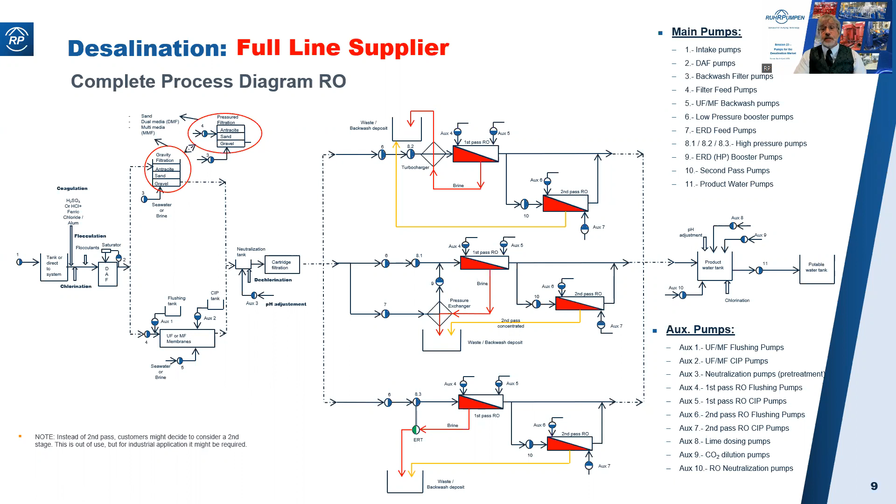This is the first pre-treatment stage - it's not always used - coagulation. DAF stands for dissolved air flotation. Chemical additives and flocculants are added, and air bubbles float the impurities to the surface.

Pump two here, DAF pumps. This is an OH1 pump, typically 300 to 500 cubic meters an hour at about 7 bar. Now, you're going to hear quite a lot of numbers, flows and heads in the next 20 minutes or so. They are purely indicative, just typical. You needn't write them down or try to remember them - you'll get a PDF copy of this slideshow, complete with my speaker notes, and that will include these figures.

Let's talk about metallurgy for a moment. The main pumps, these here, are in seawater service, and they're usually manufactured in super duplex. The auxiliary pumps down here are not in seawater service - they're in freshwater or chemical service. They're usually duplex; they could be 316L, but duplex is about the same price, and we tend to stock that material these days.

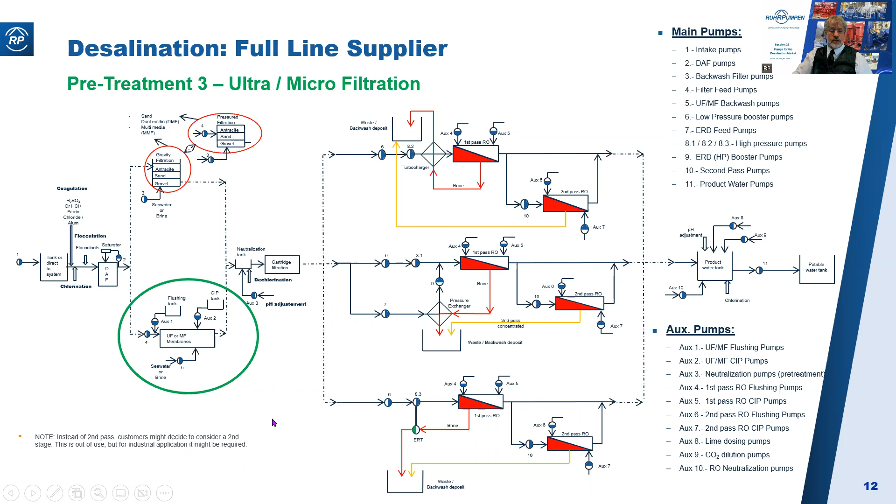And the fourth of the pre-treatments, neutralization. This is a critical process to protect the membranes. Auxiliary pump number 3 here, the neutralization pumps, small OH1 pumps in duplex, pumping acids and alkalis.

Moving on now to the main treatment. What we're doing is raising the pressure at the inlet to the reverse osmosis membranes to a value significantly above the osmotic pressure of the raw water. This osmotic pressure varies widely geographically according to how salty the water is. A typical figure might be 40 bar, in which case we would want to operate at 70 bar to maximize throughput and get a recovery rate of 40 to 45% of the inlet flow.

We show here 3 different systems, the difference being the method of energy recovery. You have 70 bar going in, and the permeate, the clean water coming out, is at 0 bar, and the brine coming out is at 67, 68 bar. So you definitely want to recover that sort of energy.

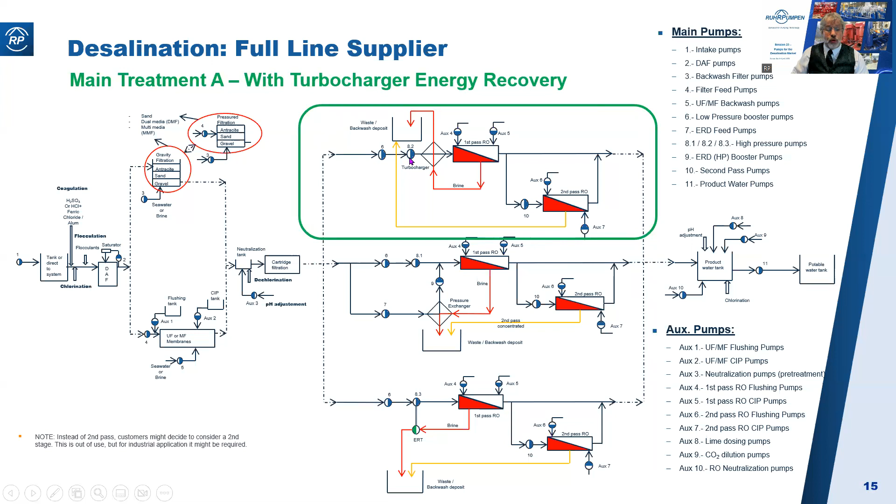System C here uses a self-standing Pelton wheel for energy recovery, like this. This is connected to a double-ended motor shaft, and so it doesn't affect the flow and head like the turbocharger did in System A. Again, it's not so common these days.

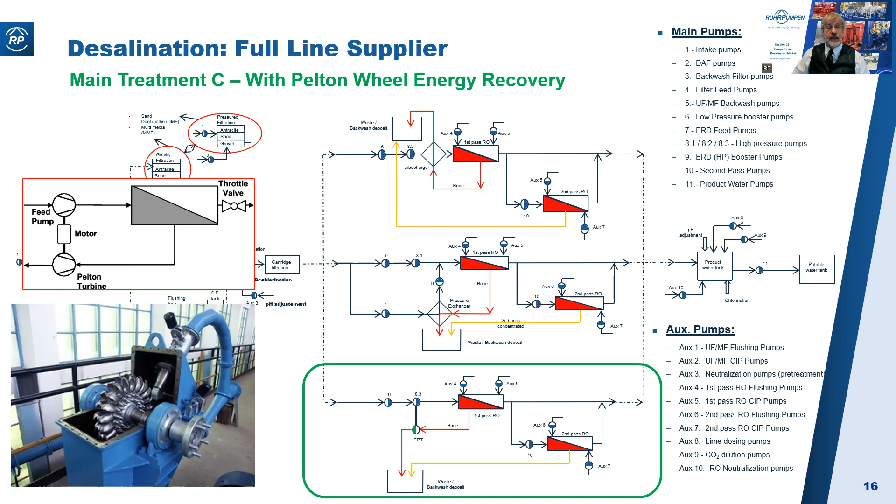This, treatment B, uses a pressure exchanger for energy recovery. This is the most important system. Incoming seawater gets split into 2 streams and goes to the high pressure pump and also to the pressure exchanger, the PX. Now this PX needs a minimum of 1 to 2 bar inlet pressure.

So depending on the seawater pressure, you may need a booster pump here, which is pump number 7, an OH1 giving 2 to 3 bar, say. The high pressure brine gives up its energy in the pressure exchanger, and the pressure here may be about 66 bar.

So we need a special pump here, pump number 9, to boost the pressure from 66 bar back up to 70 bar, the same as the outlet from the high pressure pump. I say it's a special design of pump - it's an OH1 pump designed for 69 bar inlet pressure and the high thrust that results from that.

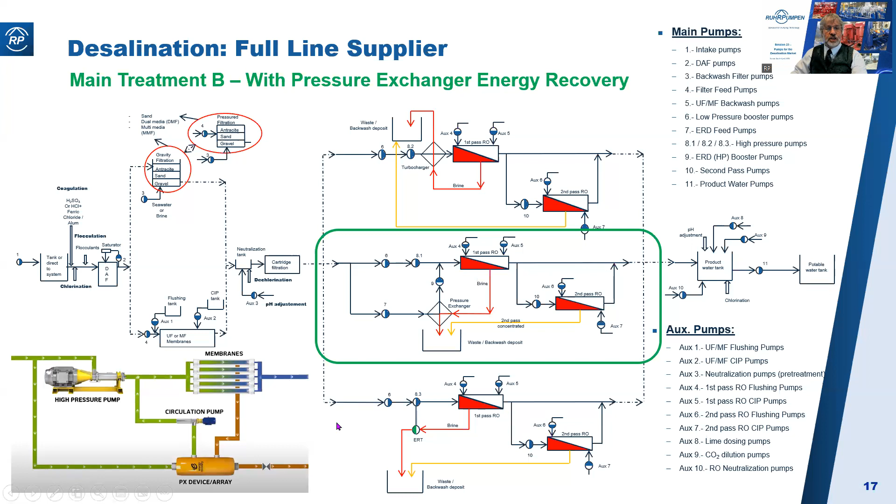Let's look at the pressure exchanger. I won't try to explain here how it works - I'll just refer you to the Energy Recovery Inc. website, where they have a very good video showing how it works.

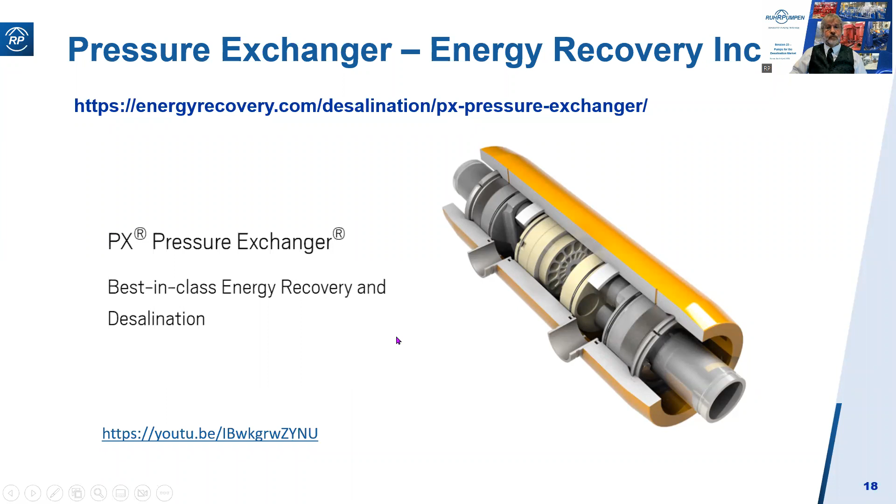In all three main treatment variants, we see the option for a second pass reverse osmosis membrane bank. This may be required to meet local water quality requirements.

The feed water to these is permeate water from the first stage, so its osmotic pressure is far less, and so the working pressure will be far less too. Feed pumps, P10, second pass pumps, will have an inlet pressure of around 0.5 bar and an outlet pressure of about 12 to 15 bar, compared with 70 bar on the previous one.

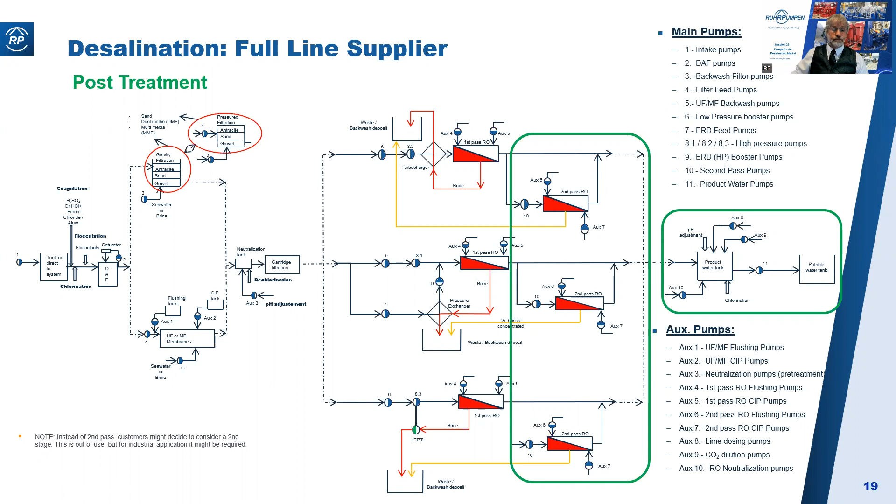It's relatively clean water, so duplex stainless steel can be used for this feed pump, or these feed pumps. Auxiliary pumps 6 and 7 will be duplex material OH1 pumps.

And so to the final stage of post-treatment to meet the required water quality. There'll be pH adjustment with lime and dilute acid and chlorination. Auxiliary pumps 8, 9 and 10: lime dosing, CO2 dilution and neutralization pumps. They're duplex OH1 pumps, 200 to 300 cubic meters an hour at 20 to 30 meters of head.

And finally, the product water pumps, pump 11. This will be a duplex material, very high flow, low head pump, maybe an OH1 or more likely a BB1 axially split case pump.

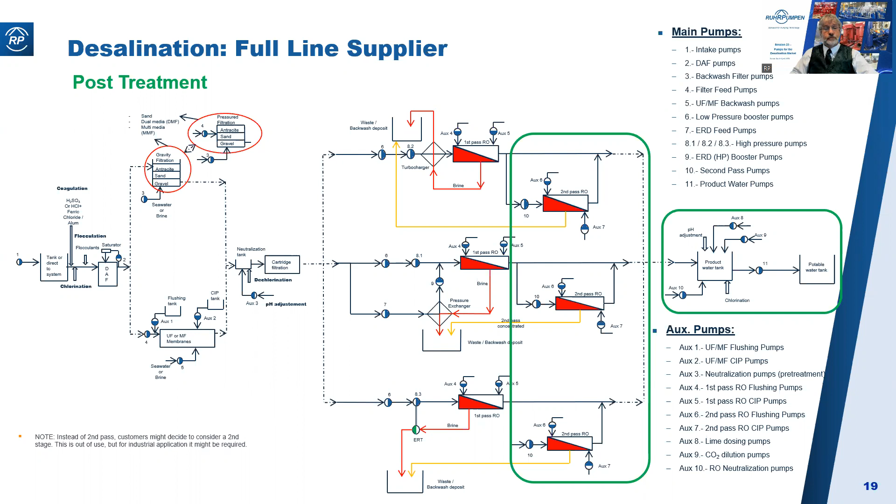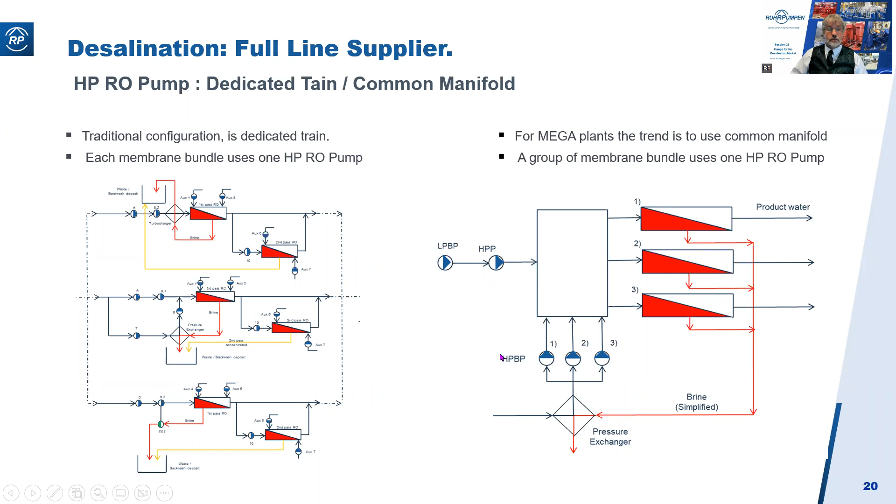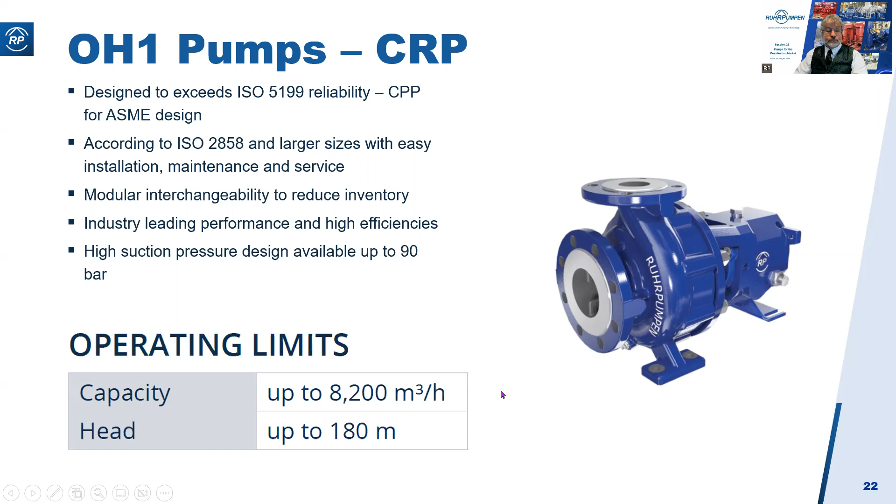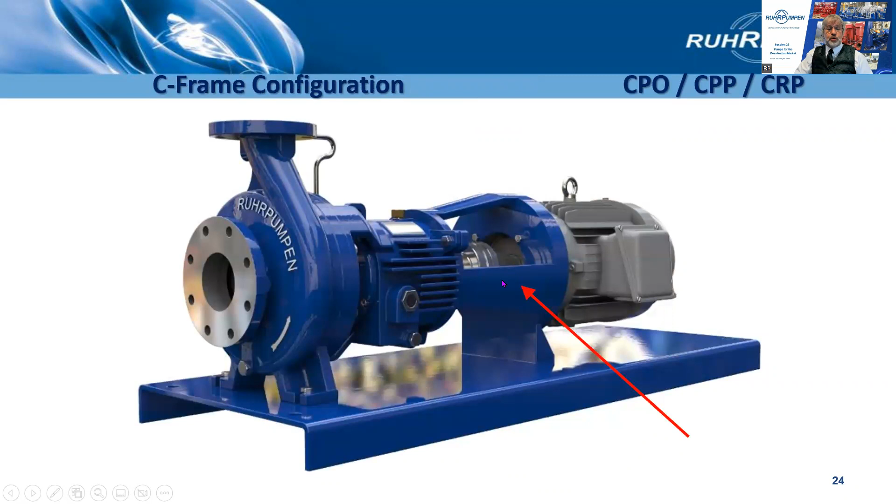The next few slides are going to look at ANSI pump features. Here's a typical ANSI or ISO pump. It's foot mounted, has a formed steel base plate, sometimes with a drain pan, and it has a foot mounted motor. A common variation is the C-frame adapter, which allows you to use a NEMA C-flange motor instead of a foot-mounted motor.

Here are some features of an ANSI or ISO pump. This is the Ruhrpumpen offering, but other major manufacturers are very similar, by the very nature of the ANSI or ISO specification. Bare shaft pumps are designed to be interchangeable between manufacturers. Bearing life, according to spec, is 17,500 hours, but Ruhrpumpen have upgraded to 50,000 hours. I'm not sure whether others have done likewise.

ANSI B73.1 specifies sizes up to 4,000 gallons a minute, but Ruhrpumpen goes up to 36,000 gallons a minute in desalination service. We've added a lot of sizes, in fact about 70 pump sizes, going up to 36,000 gallons a minute and heads to about 200 meters.

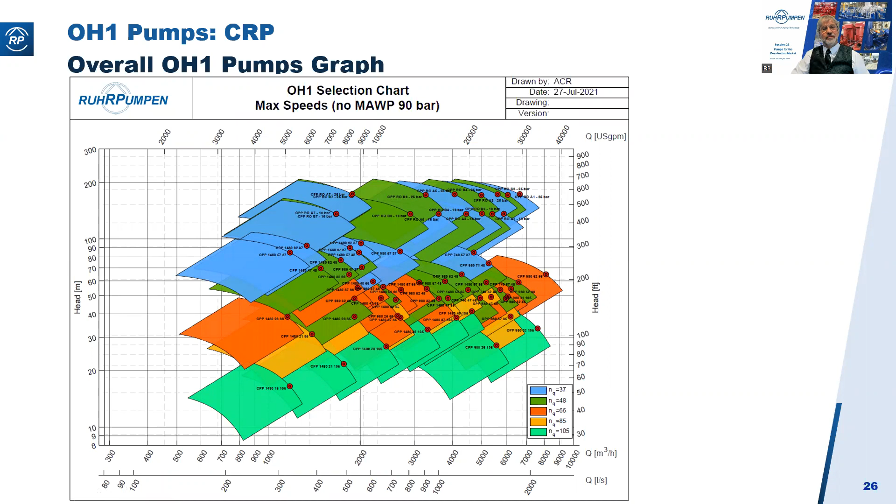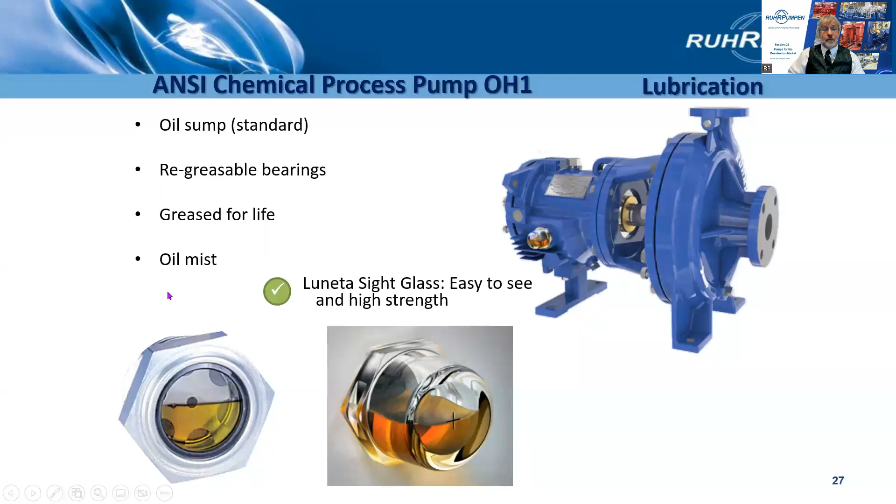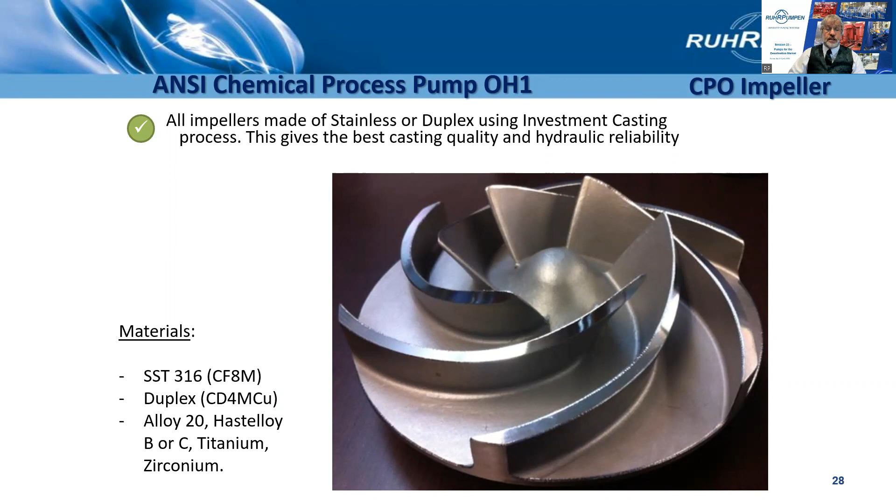We have 4 options on bearing lubrication. Many manufacturers, including Ruhrpumpen, use semi-enclosed impellers, and these can be adjusted in service to allow for wear.

Here is how the axial clearance is adjusted. This bearing carrier is threaded to the pump frame and rotates to displace axially the entire rotor, which will move forward or back and open or close the clearance between the impeller vanes and the pump casing.

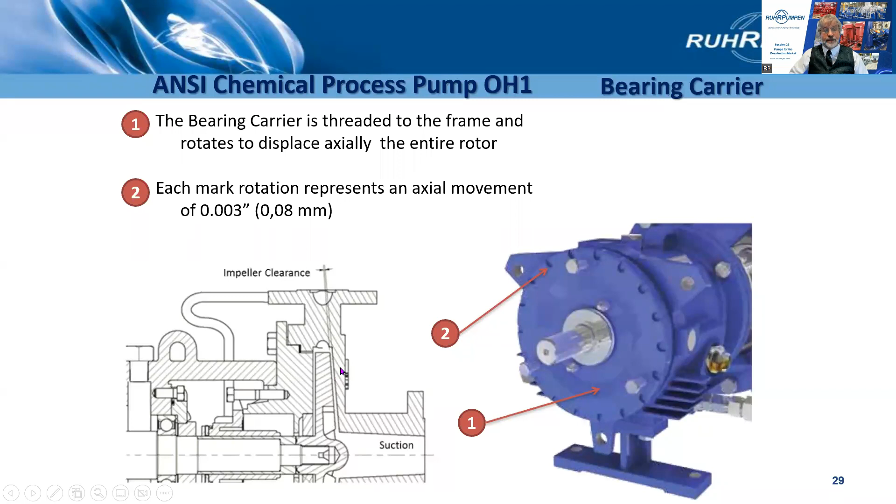Here you see it a little better, 3 hexagonal bolts. You release those and then you can twist it round, click, click, click, each click being 0.08 millimeters or 3 thou.

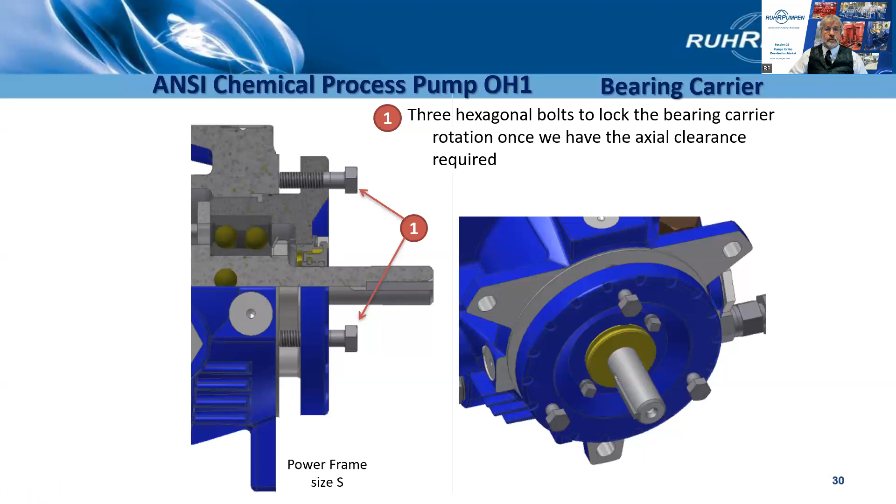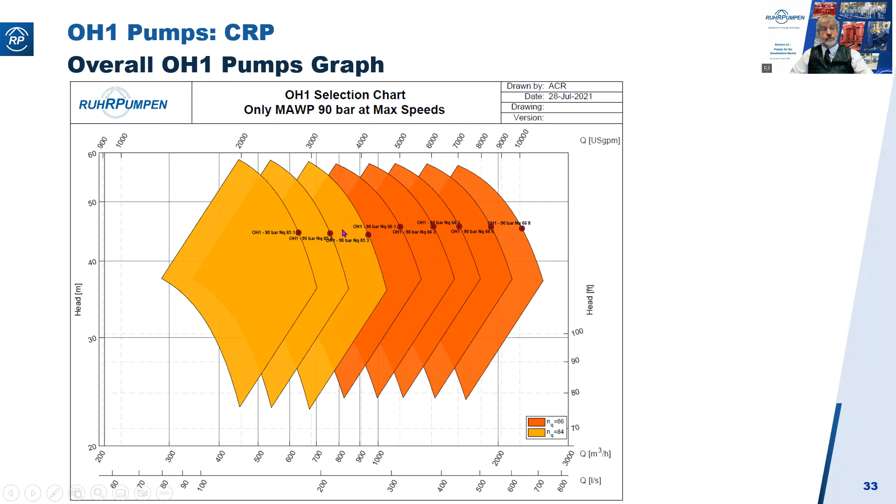I mentioned earlier some special design pumps of OH1 type, designed to handle 82 bar of suction pressure. That was pump number 9. Here are those pumps, and we're actually designing them for 90 bar max allowable working pressure. We've had to beef up the pump to withstand this pressure, but also to accommodate the thrust.

As you will realize, 82 bar pressing in this direction is going to try and push the rotor out the back end of the pump, so we've designed more robust thrust bearings to accommodate this.

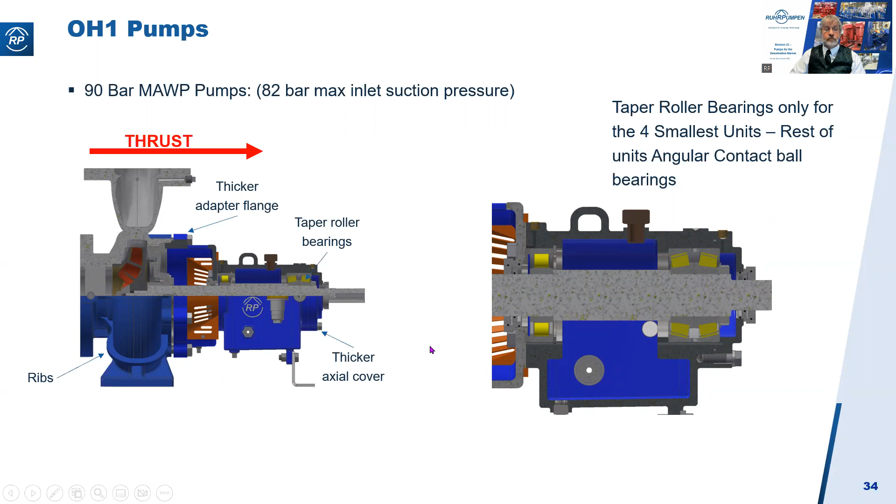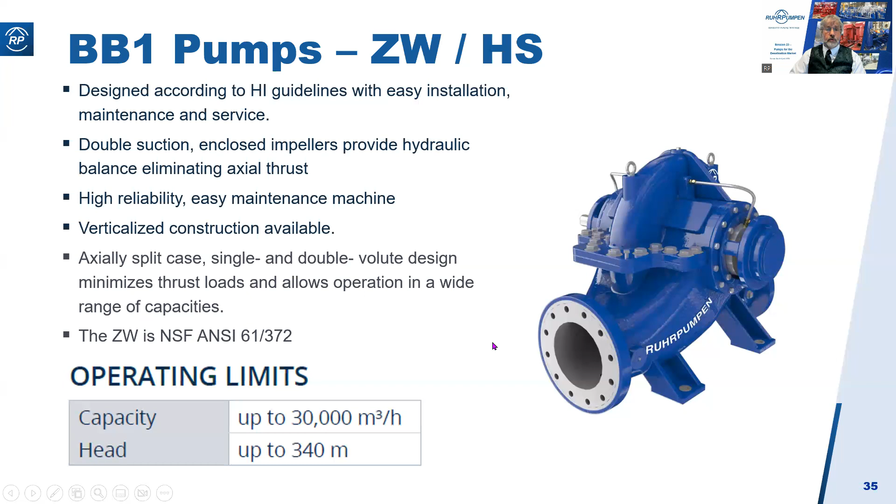BB1 pumps for the higher flows and heads, 30,000 cubic meters an hour, 340 meters. These are an axially split case pump, so you can remove the top half casing and then remove the rotor for servicing. They have a double suction impeller and a double volute casing to give low shaft deflections, which leads to long seal life and 100,000 hour bearing life.

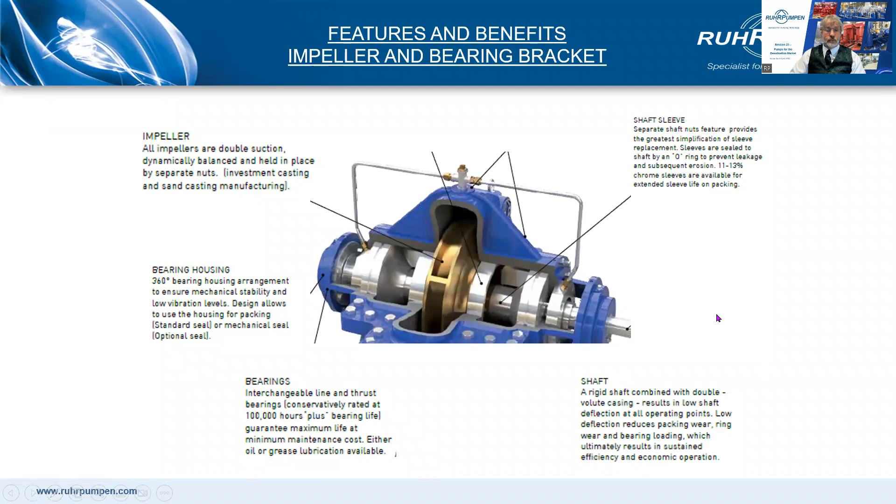Case wear rings are standard and impeller wear rings are optional. Vertical arrangement is available to simplify piping and minimize floor space. A vertical mounted pump will take up about 20% of the floor area of a horizontal base plate mounted pump.

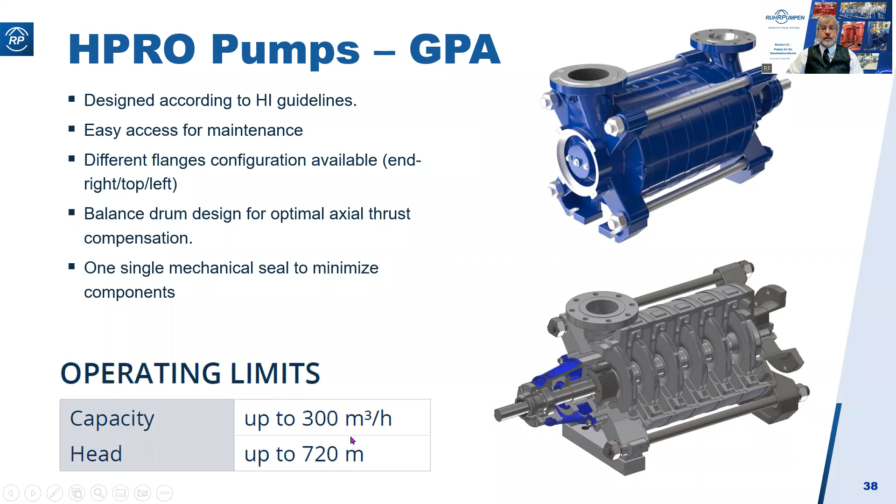The high pressure reverse osmosis feed pumps. Well, for small pumps, we have this baby pump, the GPA, up to 300 cubic meters an hour, 720 meters. Its big brother for larger pumps, larger plants, is the GP, and goes up to 1,000 cubic meters an hour.

Now, if you attended session 21 of these courses on BB4 pumps for the power market back in March, about 4 weeks ago, then the next few slides will be familiar to you.

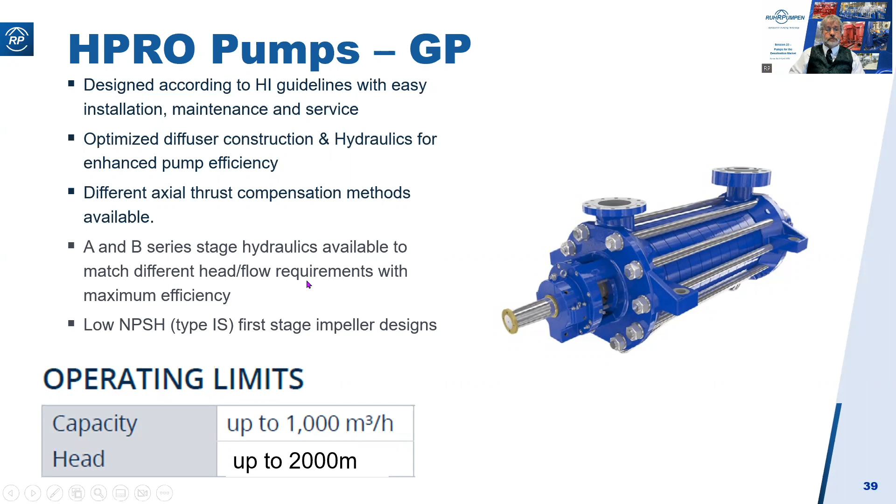BB4 pumps are described by API 610 as single case, multi-stage, radially split case pumps, but also popularly known as ring section pumps, segmental ring pumps, and tie rod pumps.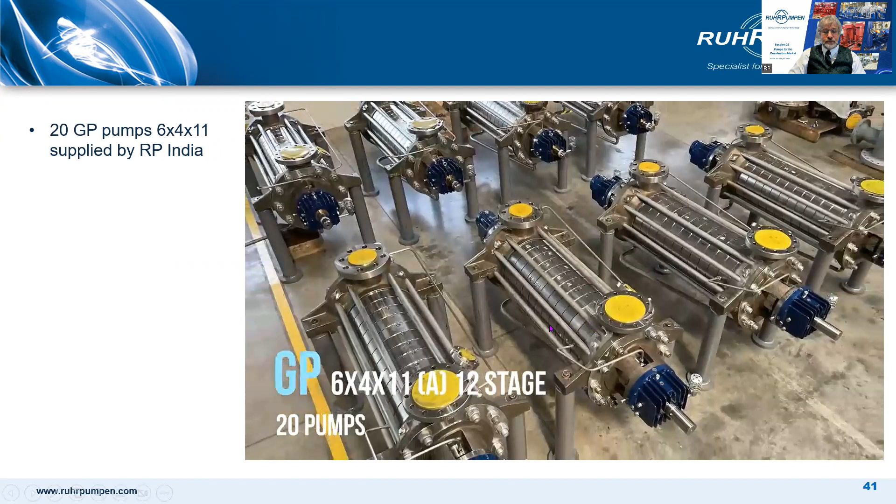This is the Ruhrpumpen model GP pump for desalination service. It's based on our market-leading BB5 barrel pump hydraulics. It's a ring section pump with tie bolt design, and it's centerline mounted.

The hydraulic design is designed for 2-pole, 50 hertz or 60 hertz. It's not a high-speed pump. It doesn't need to be either. High and low flow impellers are available for each pump size. This is good for retrofits and re-rates for duty changes in the future.

A low NPSH first stage is available, and we have designs for interstage takeoffs. This is a requirement in the power industry. It's not really necessary in the desalination market.

The hydraulics have been and continue to be optimized by CFD, computational fluid dynamics, to maximize efficiency. And this is an ongoing, continuous improvement.

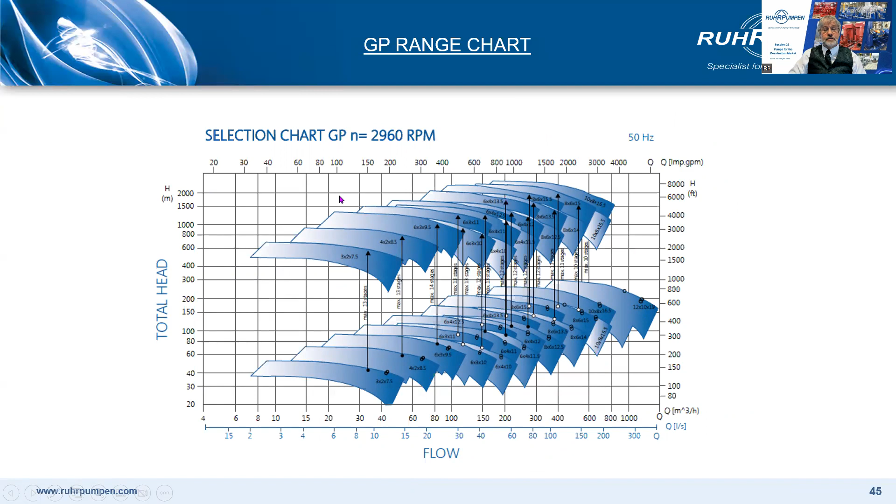Here's the range chart at 50 hertz, flows up to 1,200 cubic meters an hour and heads to 2,000 meters. And at 60 hertz, flows to, I'll give it to you in gallons this time, 5,280 gallons a minute and heads to 10,000 feet, not 1,000 feet as we show here on this scale.

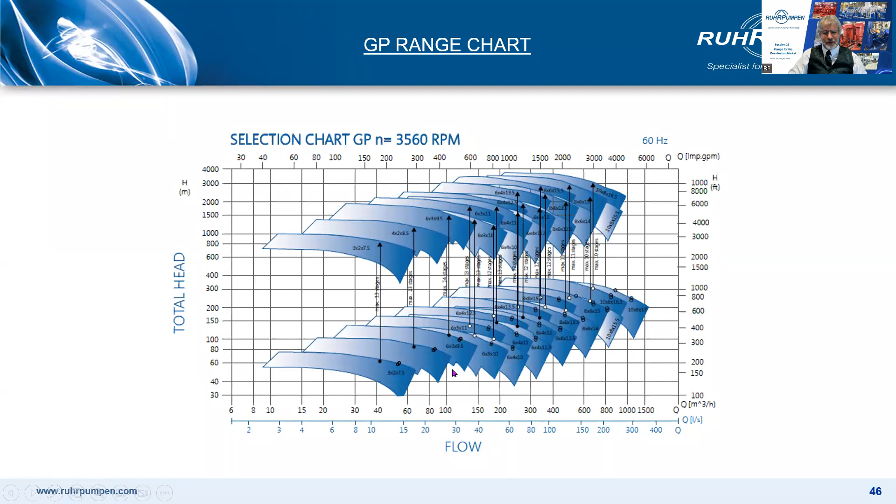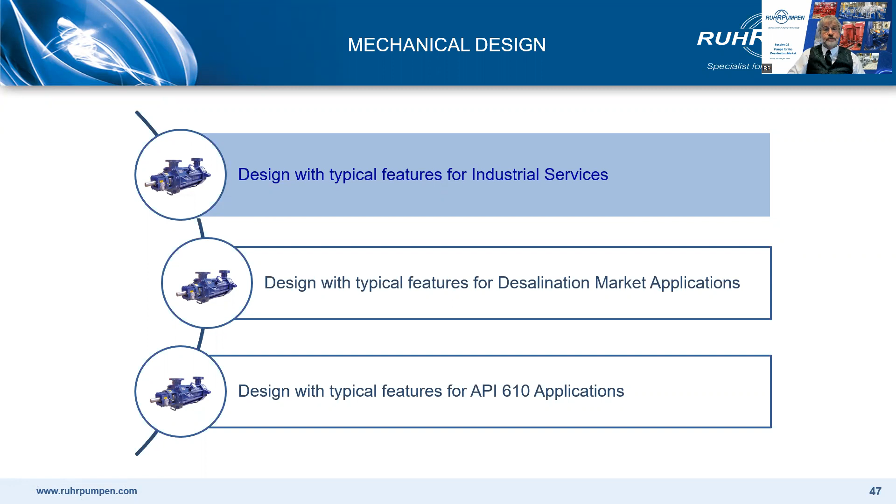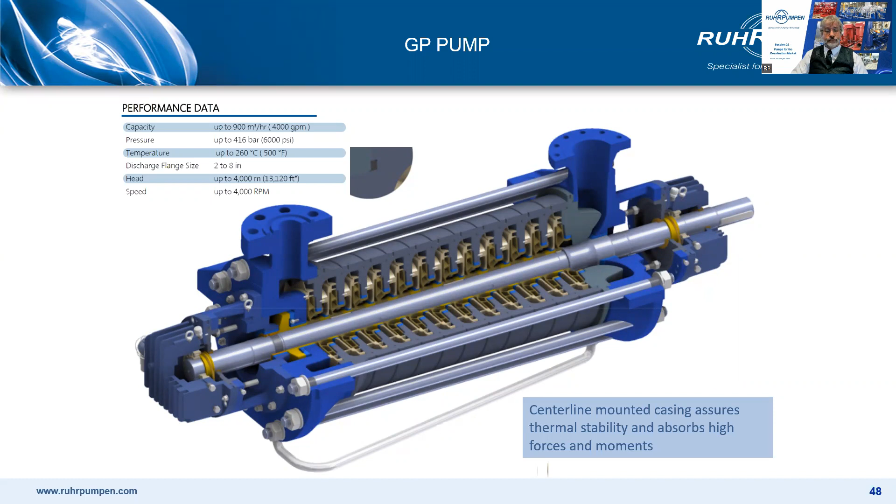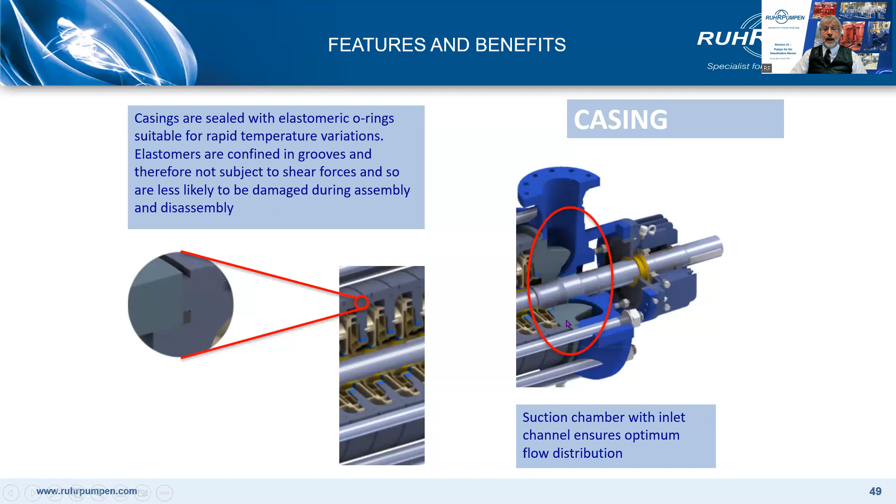Here we have the optimized inlet channel to ensure good flow into the impeller. You saw this in the earlier slide on suction chamber CFD design here. So it's been optimized to ensure peak efficiency.

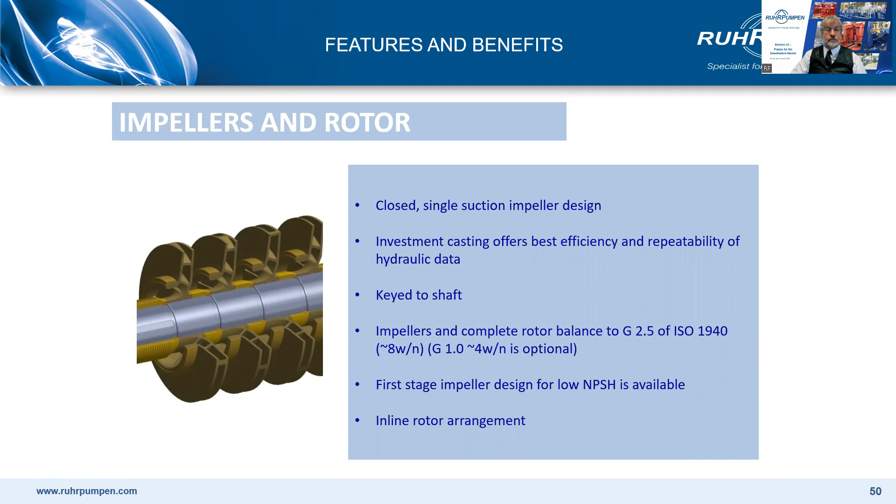Impeller mounting and shaft, we have two designs. One with a straight shaft and sleeves securing each impeller. This is used on the smaller, lower pressure pumps. The second version, the API version, with a stepped shaft and impellers individually secured by split rings. This is used on larger, higher pressure pumps.

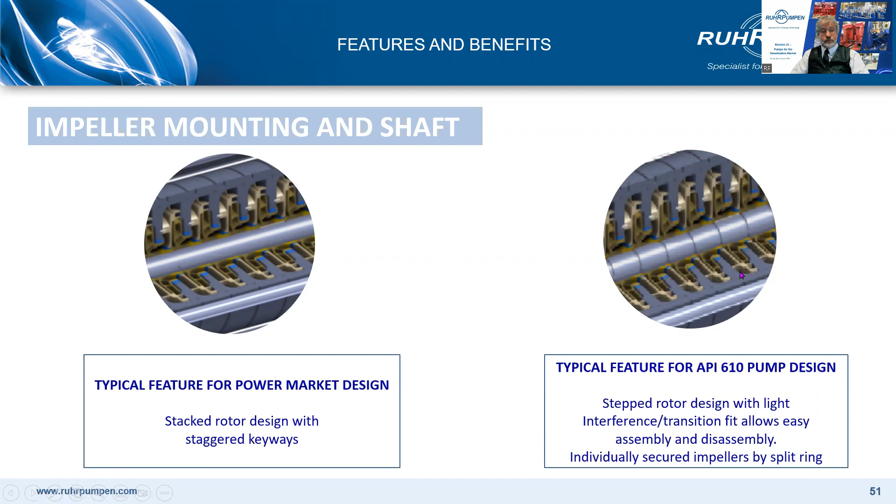Wearings. Well, the base design case has case wearings only, no impeller wearings. Impeller wearings can be fitted later at the first service. After 3 to 5 years, when some wear has occurred, you can remove the rotor, remove the impellers, machine away and put impeller wearings on at that stage.

There's no advantage to fitting impeller wearings at the outset because you still have to machine them off after 3 to 5 years to fit new ones on. So our recommendation is case wearings only initially.

We run with closer clearances than API recommends, and this is for optimum efficiency. We're pumping clean water with no solids, so it's not high temperature, so it's fine to use closer wearings, clearances, and get the higher efficiency.

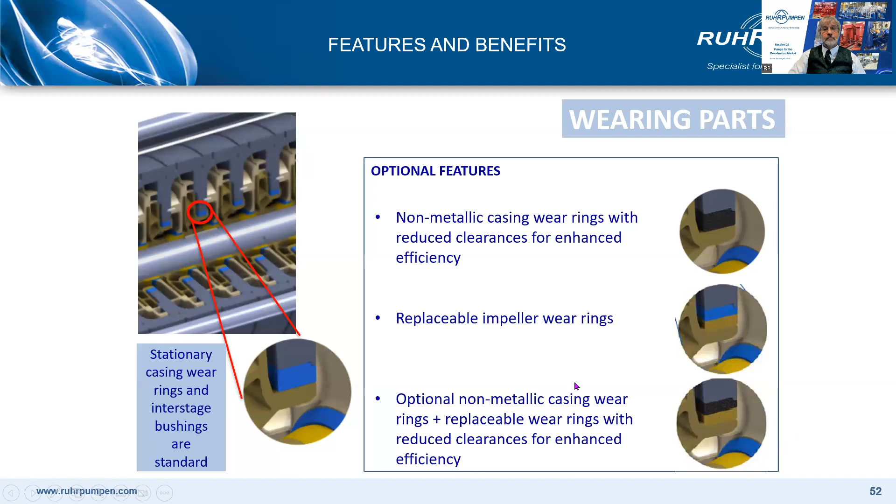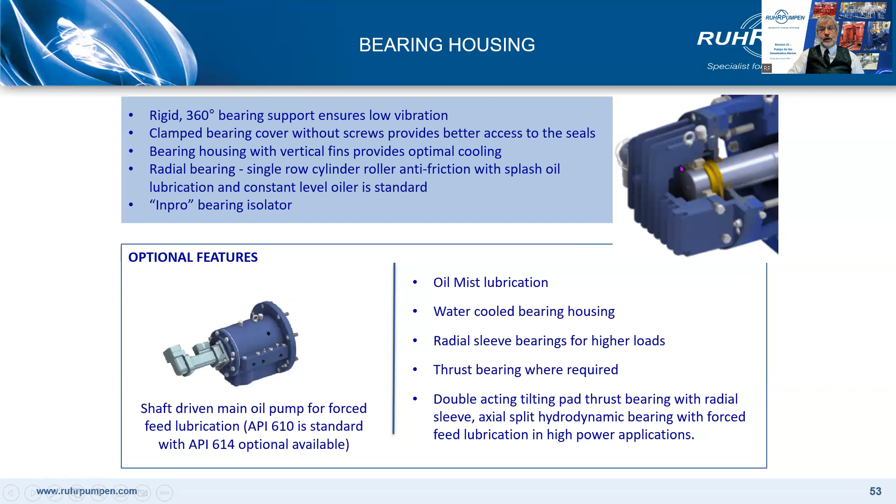Which brings us to hydraulic balancing or thrust balancing. With a BB4 pump, you have stacked impellers, all facing the same way, so the thrust builds up and is more than a conventional ball bearing can take. So there are several ways of handling this thrust.

You can have opposed impellers, 5 facing one way, 5 the other, thus equalizing the thrust. This is what we do on BB3 and BB5 pumps. On BB4 pumps, we use either a balance disc or a balance drum.

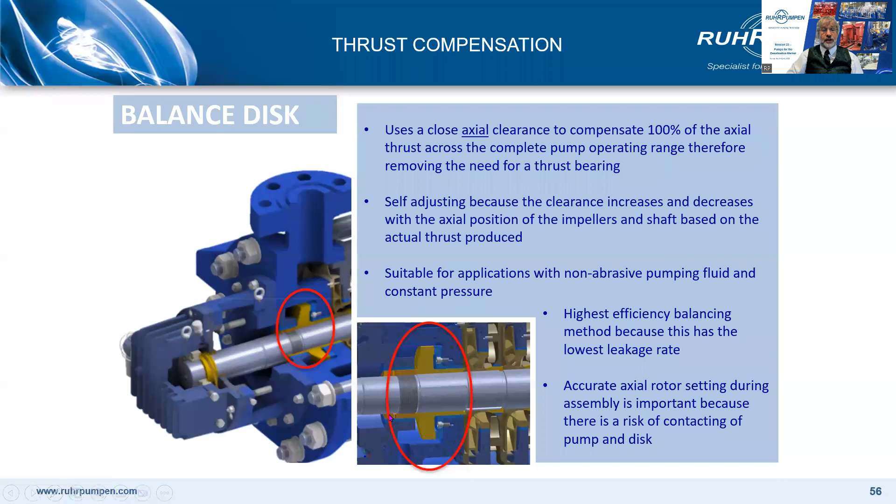Here is the balance disc. You have full discharge pressure on this side and suction pressure acting on this side. The pressure, the thrust, is broken down by close axial clearance between these two faces here. It balances out 100% of the thrust, so no thrust bearing is required, just a radial bearing.

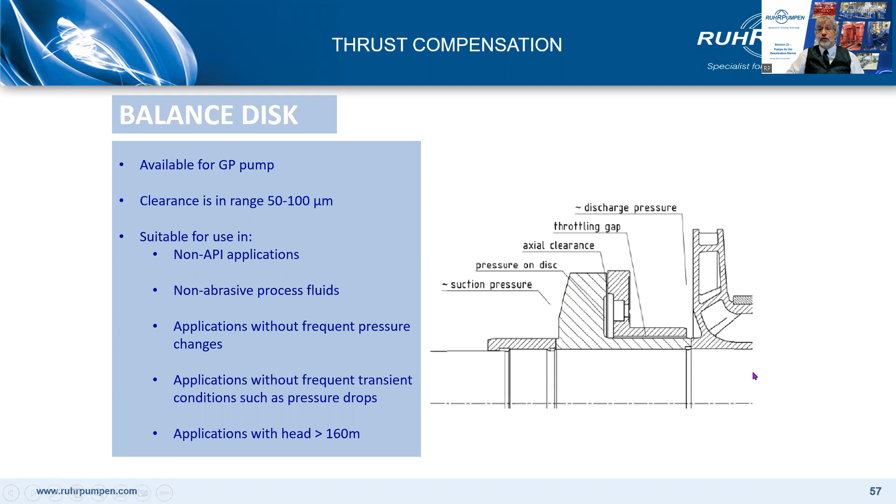Now, the close running clearances mean it's only suitable for clean fluids, so it's ideal in desalination reverse osmosis plants. API 610 is written with process fluids in mind, which are frequently hot and frequently contain solids, and they say this design is not suitable for that. Well, that's right, it's not suitable for that. API 610 therefore does not allow balance discs, but they are ideal for clean water service like this.

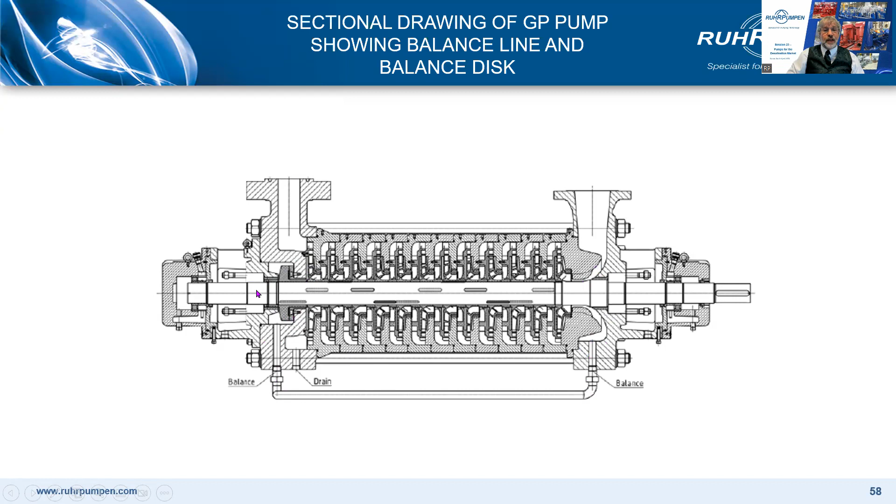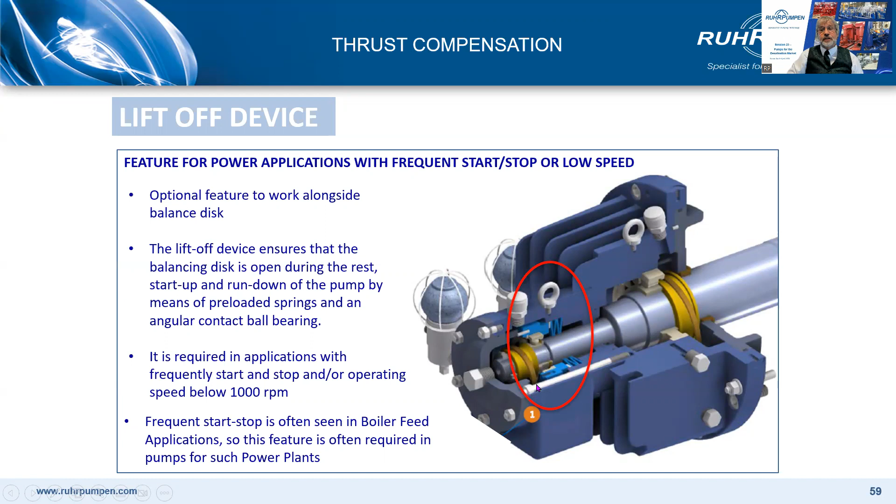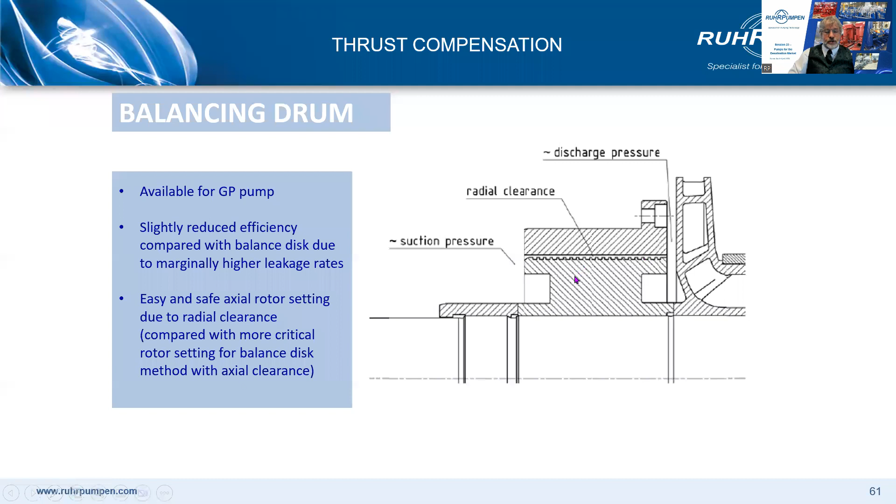We have several bearing combinations according to your needs and preferences. Here is the simplest and least expensive, used with the balance disc. We have no residual axial thrust to balance, only radial loads, basically the weight of the rotor. So we have a simple ring oil lubricated roller bearing.

If you prefer, on larger sizes, a hydrodynamic bearing, a sleeve bearing, and it's still ring oil lubricated, no force feed lubrication required.

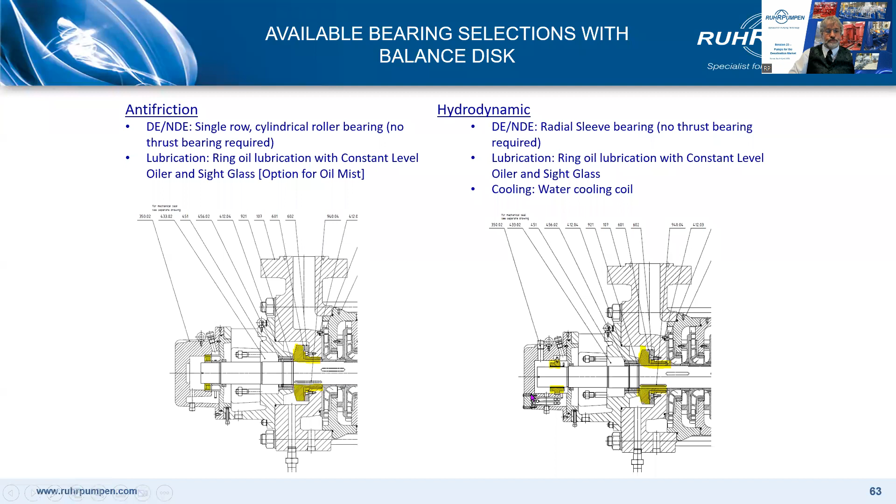With the balance drum, you have residual thrust to accommodate. It balances only 85 to 90% of the thrust, so you need an angular contact bearing, which can be ring oil lubricated to take that residual thrust. On larger pumps with higher residual thrust, or when specified by the contractor consultant, you can have a hydrodynamic or tilting pad Kingsbury type bearing, and this would require a force feed lube oil system.

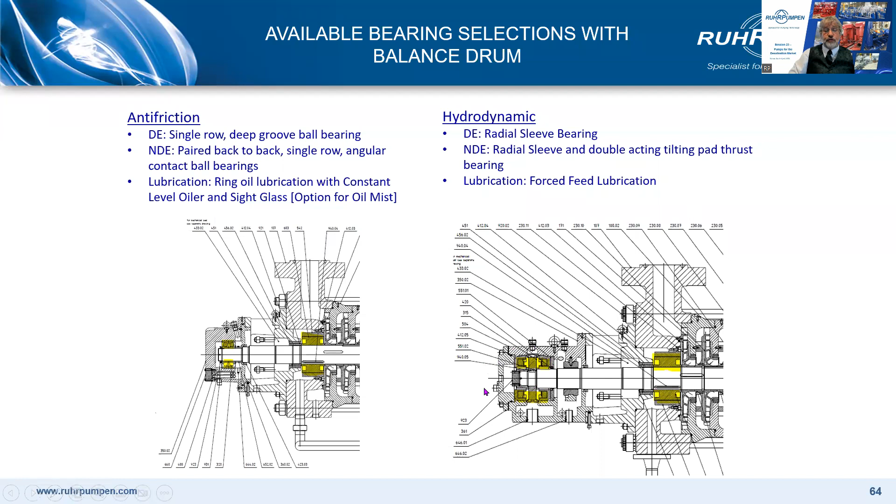The nuts on the tie bolt system need to be tightened to the correct torque. Now on smaller pumps, a torque wrench will be suitable. On larger pumps, tightening the tie rod nuts can be an issue. You may need a hydraulic nut tensioner, a very expensive, large, heavy item. But there is an alternative: multi-jack bolt tensioning, super bolts.

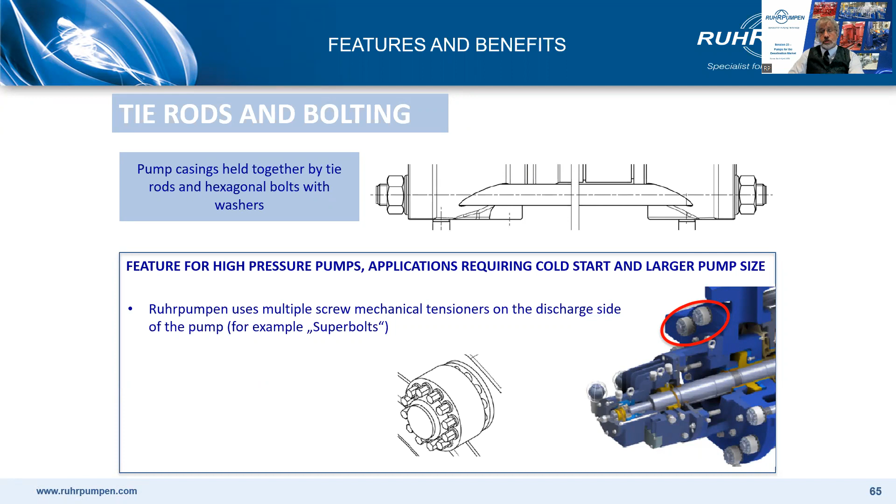This is the coolest thing I ever saw. Multi-jack bolt tensioning, widely called super bolts, although this is actually the trade name of Nordlock. Other manufacturers of MJT exist. It allows you to tighten these nuts using conventional hand tools instead of requiring a hydraulic bolt tensioning tool.

You tighten the nut by tightening each of the jack bolts in turn using conventional hand tools. Or you can buy a super bolt tool to make it even easier. It tightens all 6 jack bolts evenly at the same time.

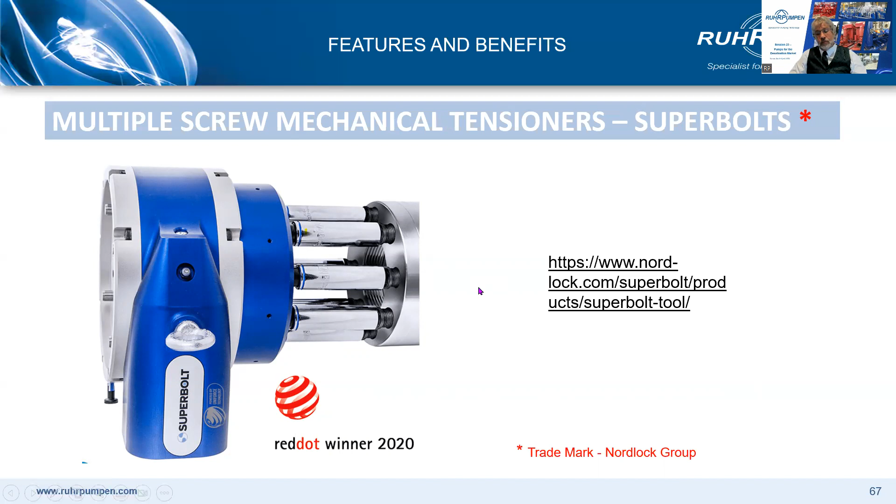So that's the BB4 pump. The alternative to the BB4 is the BB3, axially split case multi-stage pump. Axially split, so you can remove the pump rotor for maintenance or overhaul while leaving the pump case in place in the pipework.

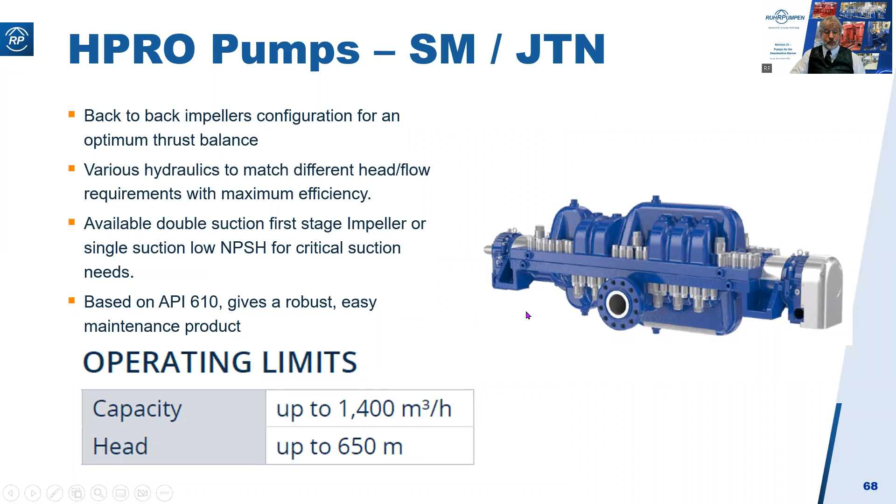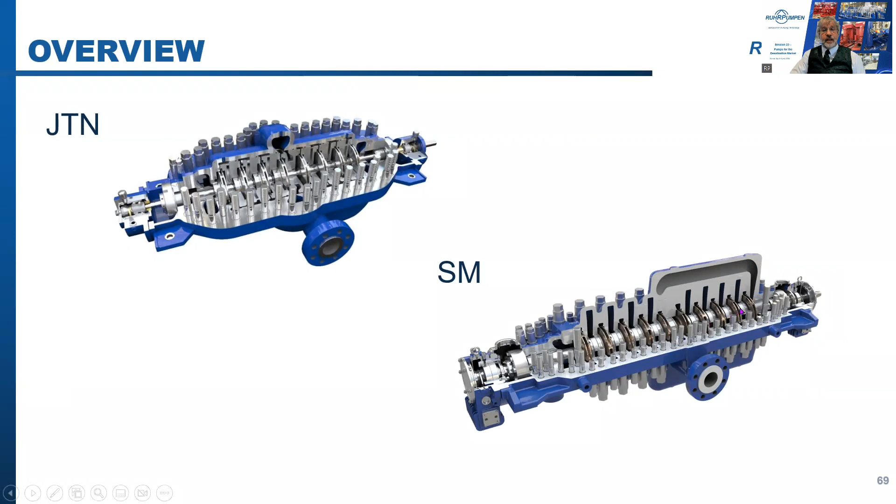2 models in the RP range: the JTN for lower flows and heads, the SM for higher flows and heads.

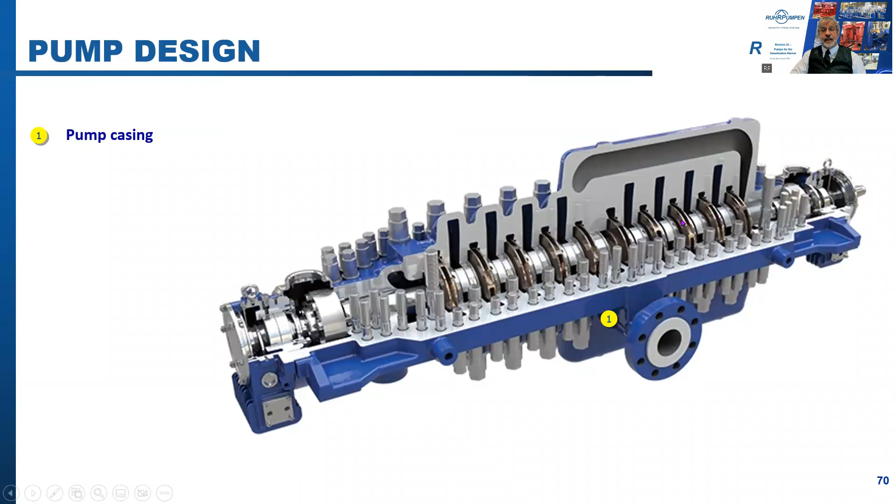Here we see the pump casing, number 1, which is a center line mounted. And as I said, it's axially split case. You can remove the rotor and take it back to the workshop to service it, leaving the casing in place.

Here are the bearing housings, number 2. There's the mechanical seal chamber, number 3. And number 4, these are the impellers. The impellers are in a back-to-back arrangement, half facing one way, half the other. This means that the hydraulic thrust is balanced out, and you don't need expensive tilting pad bearings and lube oil systems.

The flow path is like this. You can't see it, but the suction flange is on this side. So it comes in here to the suction, into the first stage, out into the second stage, out into the third, fourth, fifth, and then it gets into this crossover and comes back in the other direction. Stage 6, out, 7, 8, 9, 10 in this 10-stage pump, and the flow comes out of there, out of the discharge.

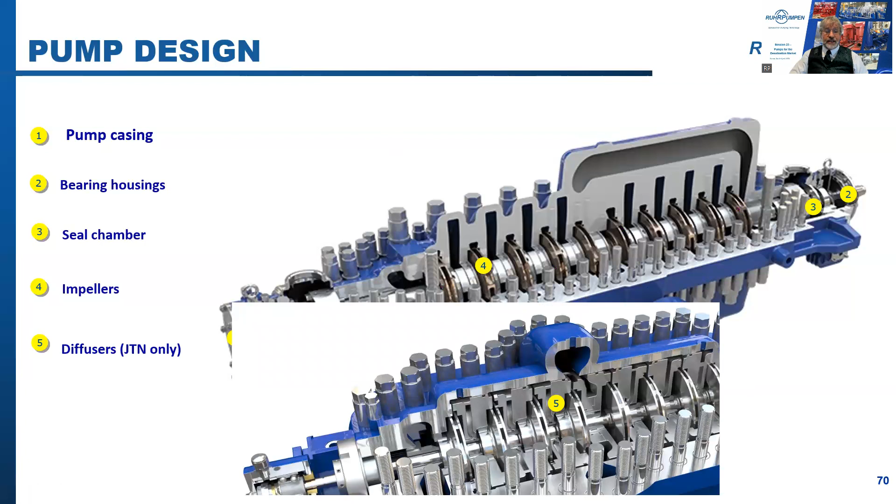Now the JTN is a diffuser design, and the SM is a volute design.

So why the difference? Why do we have 2 designs? Well, we use diffusers on the smaller sizes, the JTNs, as they are machined from solid and give excellent repeatability, even at small sizes with small flow passages. Small volutes are difficult to machine and polish, so they're not so good on the smaller size pumps, which is why we use the diffusers. They give better performance and efficiency.

But on larger pumps, the flow passages are larger, and you can easily get in there to machine and polish for optimum efficiency. So volute designs are the better solution at larger size pumps.

Impellers and cases are fitted with wear rings, number 6. And finally, the vent and drain.

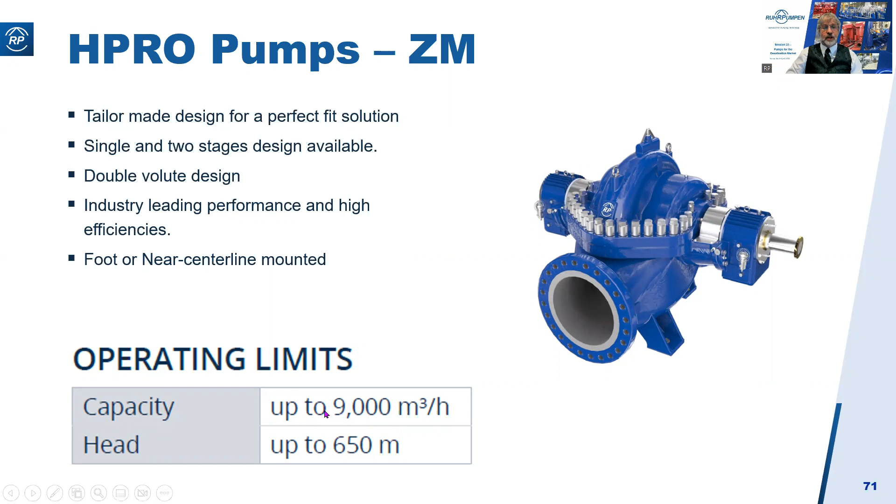Moving on, a BB1 pump, our type ZM, is sometimes used as the high pressure feed pumps, and it's frequently used as the product water pumps, sending the treated water into the water main. They're a high pressure BB1 pump, up to 9,000 cubic meters an hour, 650 meters.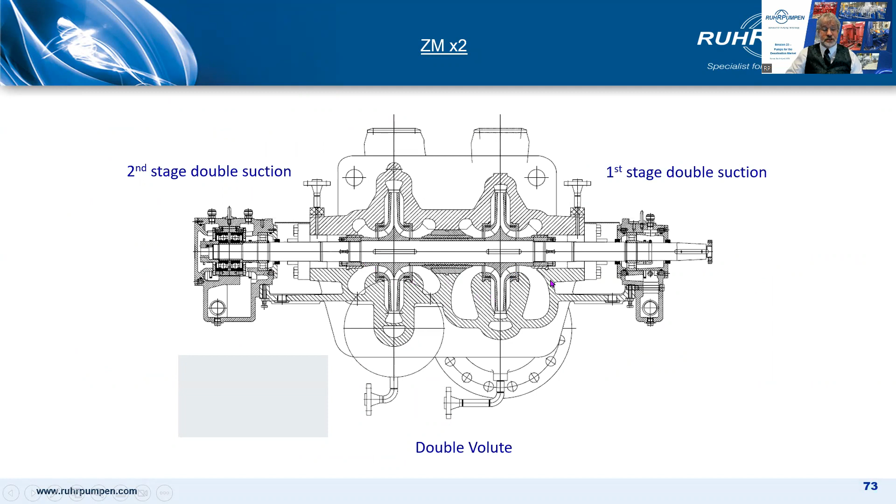Here we see it as a single stage pump, and here as a two-stage pump. In this case, both stages are double suction. Well, here the first stage is double suction and the second is single suction.

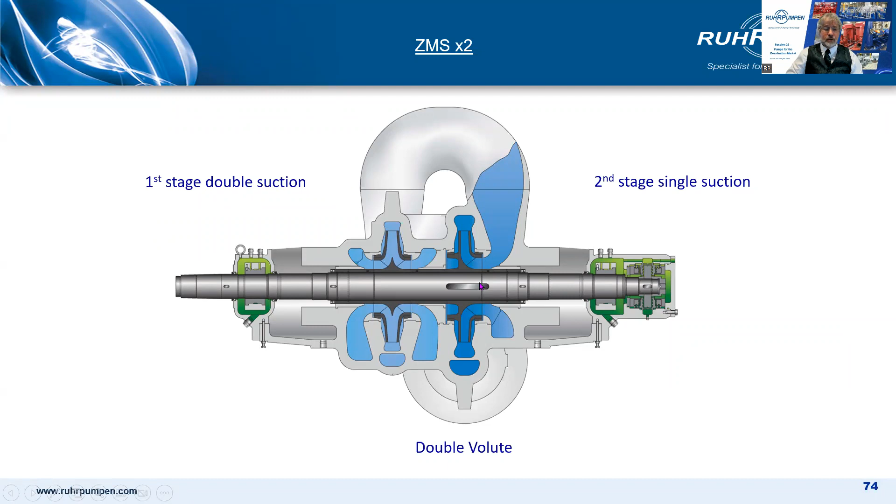On small RO plants at low flows and high pressures, a positive displacement pump might be the better option. So triplex and quintuplex plunger pumps. While they are more expensive, they have a very high efficiency, up in the 90%. And they're particularly useful for ZLD, zero liquid discharge process, which is a low flow and very high heads, greater than 100 bar.

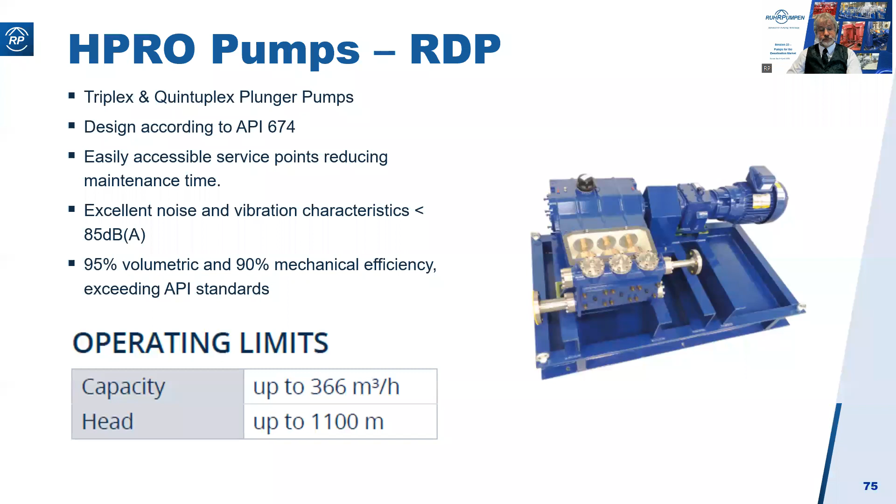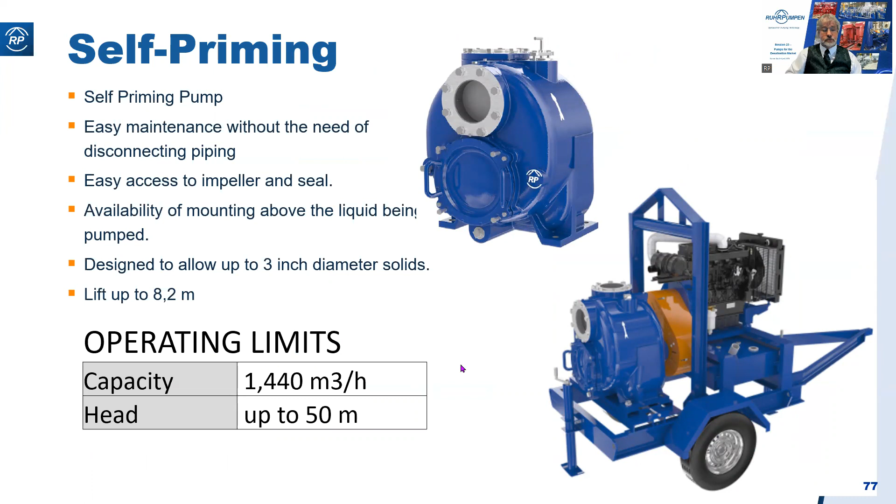Self-priming pumps are sometimes used as intake pumps on smaller plants, and they're sometimes used for chemical dosing. The intake pumps on small RO plants are sometimes submersible wet pit pumps, like this.

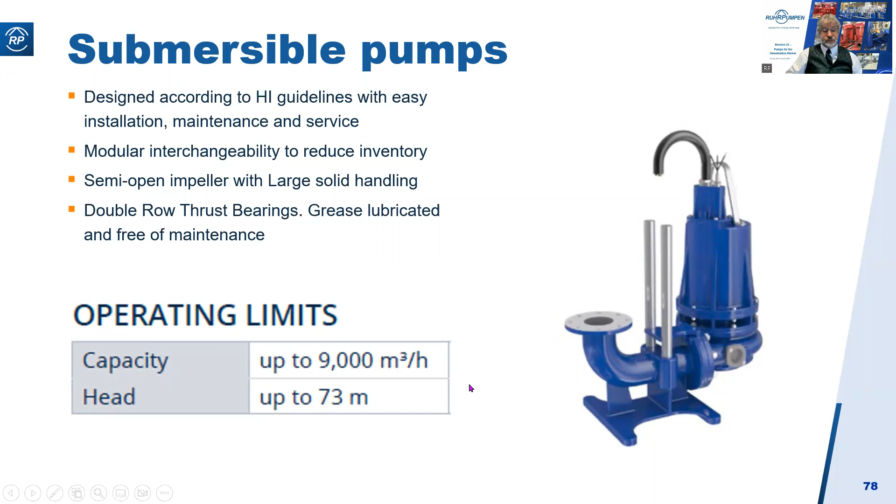And finally, we'll move on to quality and inspection, but I'm not going to spend long on this. Ruhrpumpen is a high-quality manufacturer of pumps to many industries. The oil and gas industries require a lot of inspection and testing. Desalination plants typically do not.

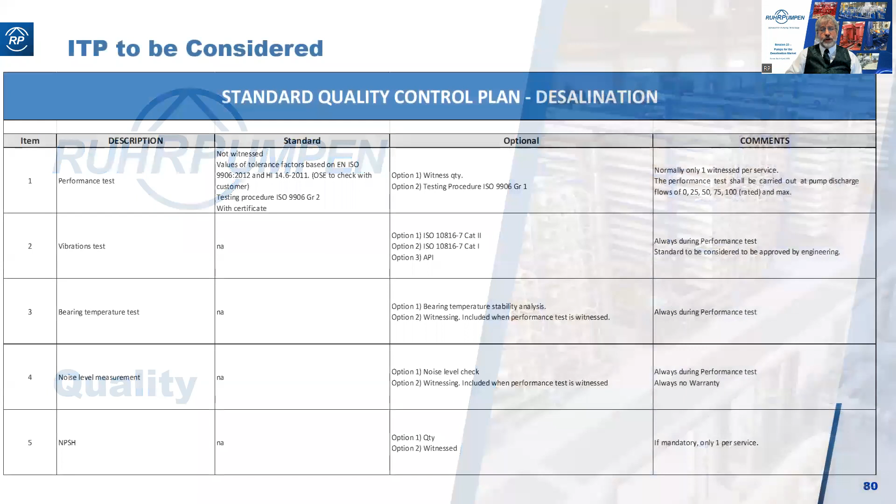So the base starting point for these pumps is non-witness performance, non-witness hydro, non-witness dynamic balance, 2.1 or 2.2 material certs, and visual examination of components and the final assembly.

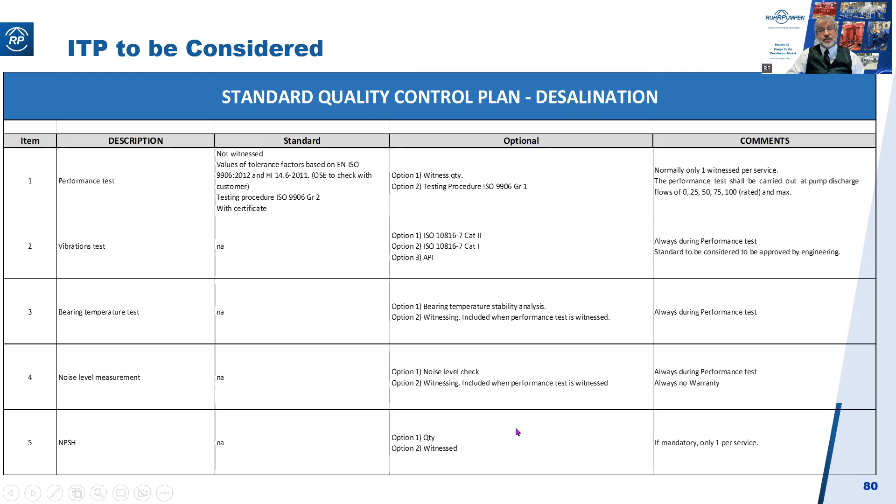But we can do pretty much whatever you want and whatever you want to pay for. As you see, we can witness the performance tests, we can carry out vibration tests, bearing temperature tests, noise level measurement, NPSH tests. All of these can be witnessed if necessary.

Strip test, witness the hydro test, witness the balancing, dynamic balancing of the couplings, 3.1 type material certification, PMI, liquid penetrant examination, magnetic particle examination, ultrasonic testing, and radiographic examination.

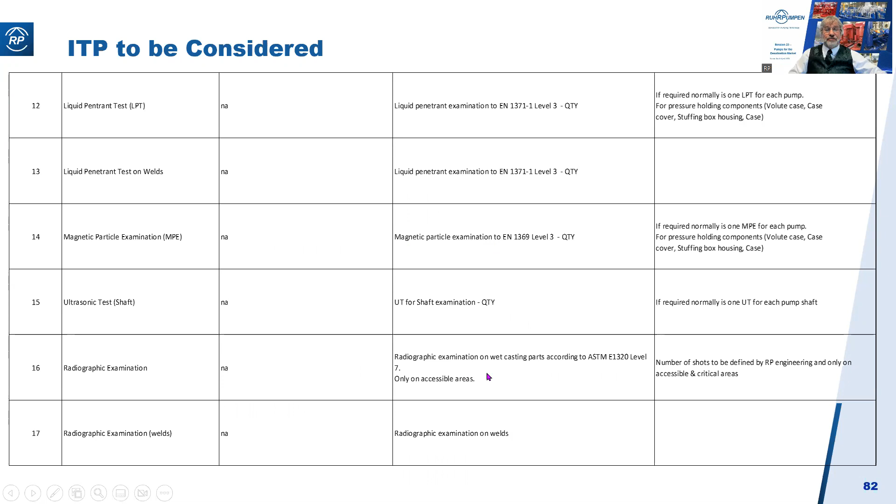So all of these things can be done. Because we do it every day for the oil and gas industry, we can certainly do it for desalination plants. But generally, it's not required. The usual standard is really fairly basic non-witness tests, standard non-witness testing.

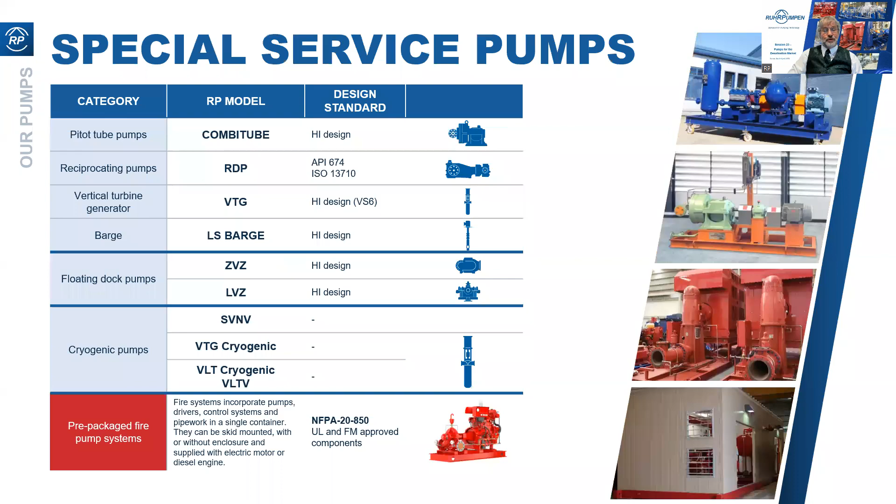Let's have a look and see if I have any questions. Yep, we have a few here. HF Yi has asked, which one is more suitable for water pipeline, BB3 or BB4, and why?

It is largely a matter of opinion and price. On the smaller sizes, the BB4 is going to be the better, cheaper option. BB3's big advantage is that it's an axially split case pump. You can remove the top half of the case, remove the rotor, and take it away to the workshop to work on it. You probably have a warehouse spare you can bring in, drop it back in, and you're up and running in one day. The BB4, you have to remove the whole pump to service it.

BB3 also has the advantage of opposed impellers. I gave the example of 5 facing one way, 5 facing the other way, which balances out the thrust. There's no residual thrust, so you don't need a tilting pad bearing or anything. Even at quite large sizes, you can get away with angular contact bearings, which are ring oil lubricated. So largely that's the advantage. Probably when you get to the larger pumps, the common manifold pumps, higher flows, you're more moving into BB3 away from BB4.